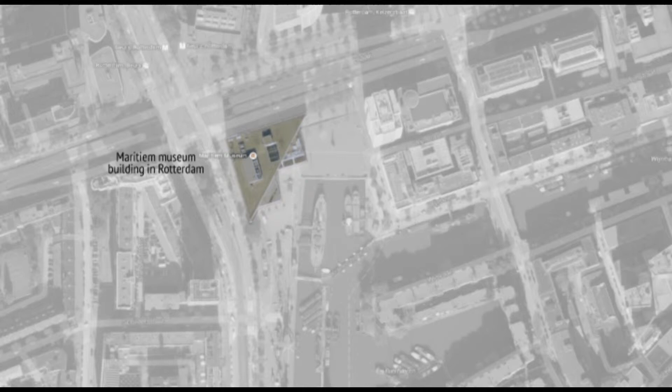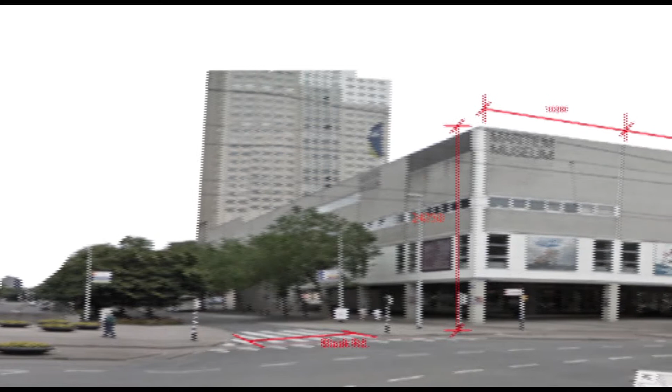The site. Maritiem Museum is located in the center of Rotterdam, near the Old Harbor. The building occupies the corner of two streets, Schiedamse Dijk and Blaak. It's 21 meters high and has a column structure with a grid step of 10.2 meters.

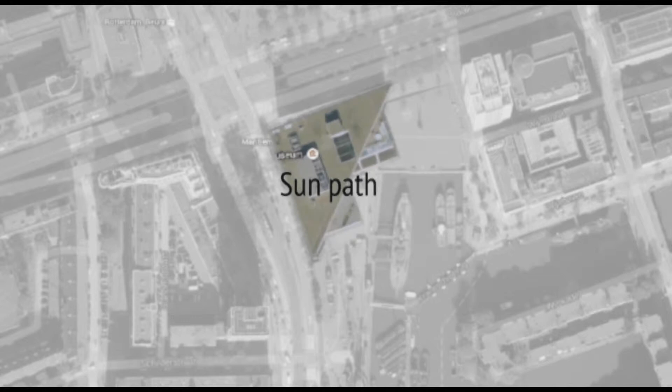Sun path. In summer, the sun rises at about 6 a.m. and reaches the highest elevation angle of 60 degrees. The sunset in summer is about 10 p.m. In winter, the sun rises at about 9 a.m. and the maximum elevation angle is 15 degrees.

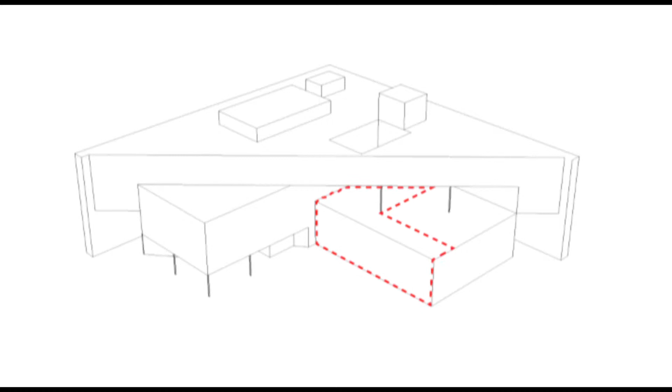The problems. The chosen fragment is the atrium with a glass roof and south-facing facade. The existing glass roof is the major problem of the chosen fragment. It has leakage and doesn't perform well enough.

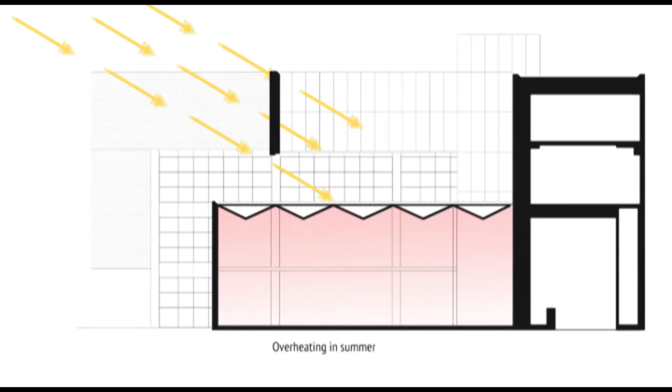During summer, the atrium space of the Maritiem Museum overheats. In winter, heat is lost because the glass roof acts as a cold bridge.

Question and solution. The research question of our team is how to improve the energetic performance of the building, focusing on the use of natural resources in a more effective way.

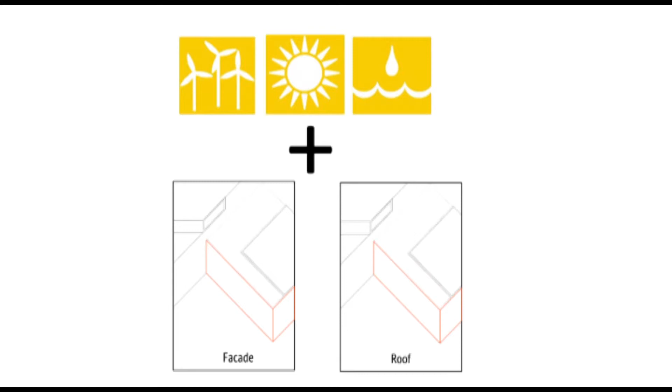Natural resources available in the current situation are wind, sun, and water. They could be applied on the south facade or roof. Therefore, the following solutions are presented.

Solution 1: Double facade for ventilation. In terms of ventilation, the first approach is based on the principle of Debis Tower in Berlin, with a double skin facade which can be adjusted depending on occupants' wants.

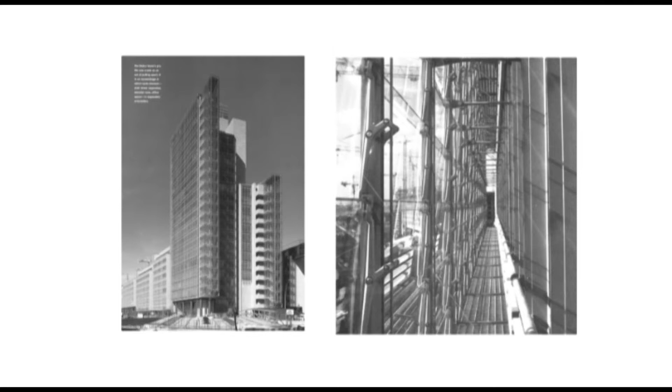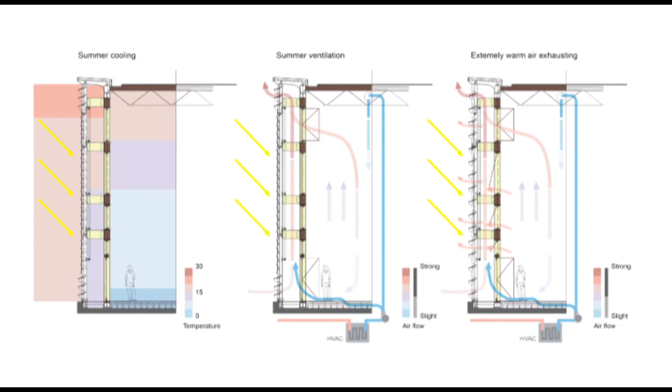In summer, the main points of achieving comfort in this climate are to cool down the building and prevent overheating. As a result, the double facade will be an air curtain with top and bottom openings on the external facade. However, in case of overheating, both facades can be opened for immediate warm air exhausting.

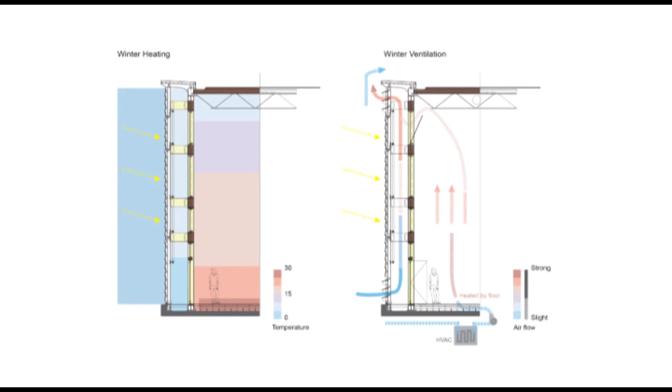In winter, the ultimate goals of the double facade are to heat up the building and keep the warm air inside. In this case, both facades will be sealed. Then the cavity between the two layers will generate a greenhouse effect and perform as a buffer zone for insulation.

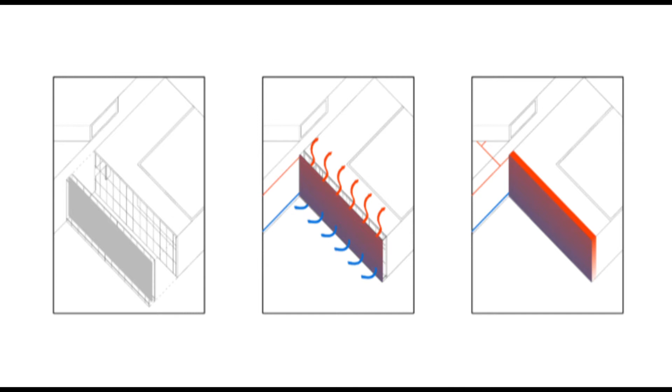Solution 2: Liquid facade. The key concept of the liquid facade solution merges two favorable results of the circulation of liquids within the transparent envelope. The system is based on the possibility to fill the cavity of a double glazing window with fluid like water, although due to the complexity of the solution only prototypes have been produced.

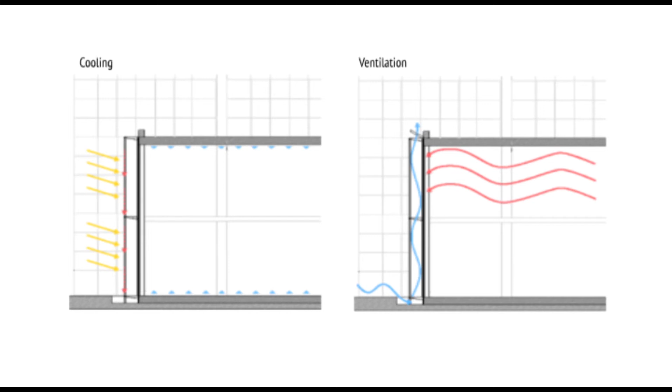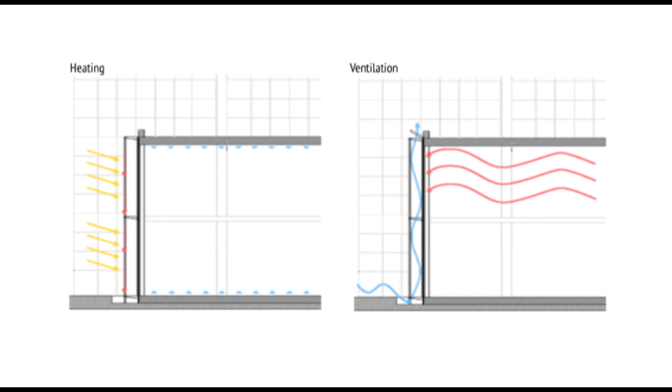The effectiveness is guaranteed by the production of flows in the cavities that continuously replace the heated water with new, fresh water. A ventilated buffer between the two layers of the double skin facade helps to cool both of them, preventing overheating. Once the energy is absorbed, the water passes through an absorption heat pump where the heat is gathered to cool down a fluid for the cooling needs of the building.

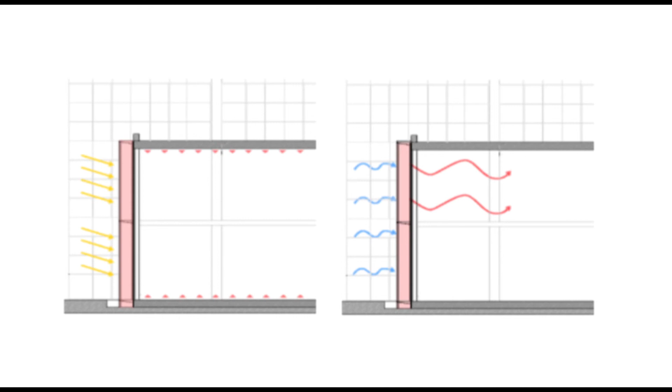Especially in winter, the water continues to gather energy, which can then be used to heat by switching the flow to a heat exchanger. Solution 3: Trombe wall.

The third solution for the chosen fragment is based on the concept of the Trombe wall, which acts as a heat storage element. One example is the Kelbaugh House in Princeton, United States, which uses a Trombe wall with vents to improve the energetic performance of the building.

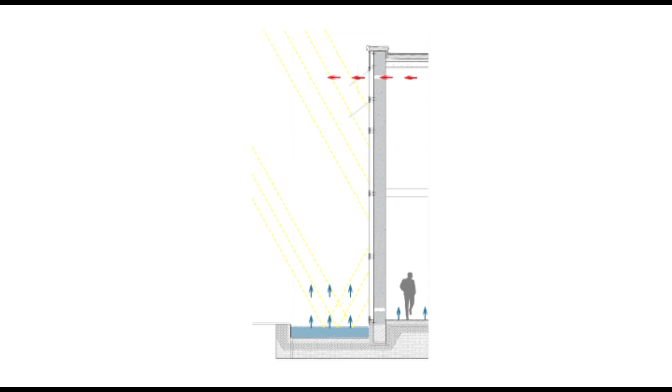During summer, upper operable windows of the outer glazing layer and upper vent dampers of the inner layer are open, allowing rising hot air to escape. This ventilation doesn't allow air heating inside the cavity, which prevents the Trombe wall from overheating.

The Trombe wall performs as an additional heat source during winter and mid-season. During this period, both upper and bottom vent dampers of the inner layer are open. Cold air enters the air cavity through the bottom vents, heats up in the cavity, rises, and enters the room through the top vent.